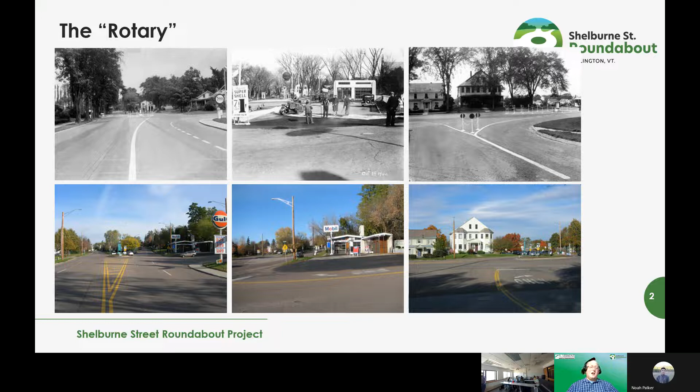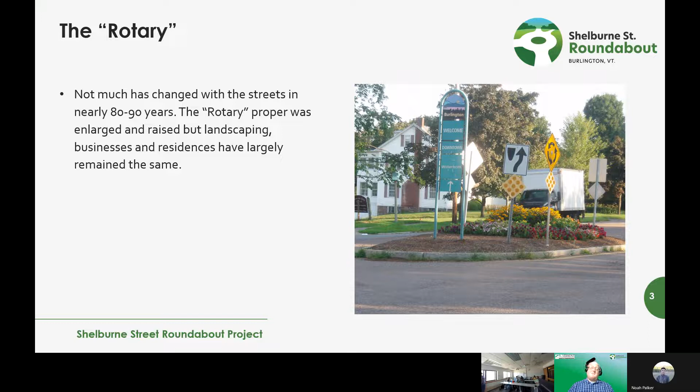These are just some screenshots of what the Rotary intersection used to look like, from the 1930s and 1940s. It really hasn't changed much over the better part of a century. Colloquially, it's called the Rotary, even though it was only a little tiny island. For whatever reason, that's what the locals called it. So yeah, nothing's really changed. We've had some landscaping, some residences and businesses have come and gone, but other than that, the intersection's been the same and it's been in dire need of some help.

Why does it need help? Here's a long list of reasons. It's been on the high crash location list for at least the last 25 years consecutively. I can't think of another intersection in all of Vermont that has been on our high crash location list consecutively for this length of time. The Rotary, the little island, was just too small to create any sort of safety benefits to motorists. We'll talk about non-motorists as well, but motorists up front, because the HCL is really about vehicular crashes.

It was too small, so it didn't really do its job, and it was just wide open out there, so it didn't really encourage people to slow down. It probably encouraged people to speed, if anything. The left turn movements were really awkward because of the size and location of the existing island, as well. And there are some uncontrolled drive accesses, and the school and the church are nearby. These are all different reasons why this intersection lacked safe mobility.

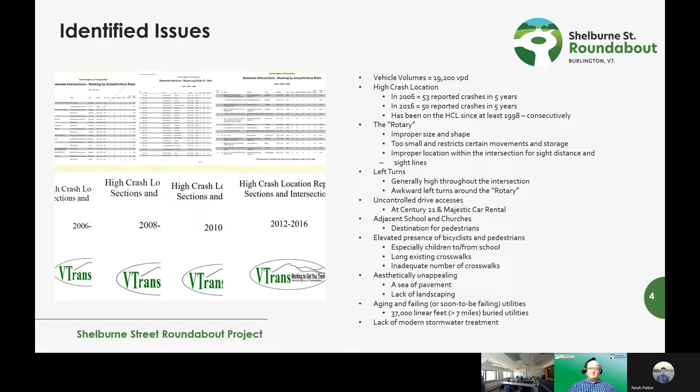So in 2003, the city reached out to the RPC, and they really wanted to look for a solution here. They did some studying, and ultimately, long story short, they came up with the modern roundabout as the solution. Because we're in active construction now in Burlington, I don't have any pictures of the roundabout yet, but we will. So I provided some pictures of a roundabout we constructed a couple years back in Waterbury that's identical in size. So this kind of gives you an idea of what we're going to be constructing in Burlington.

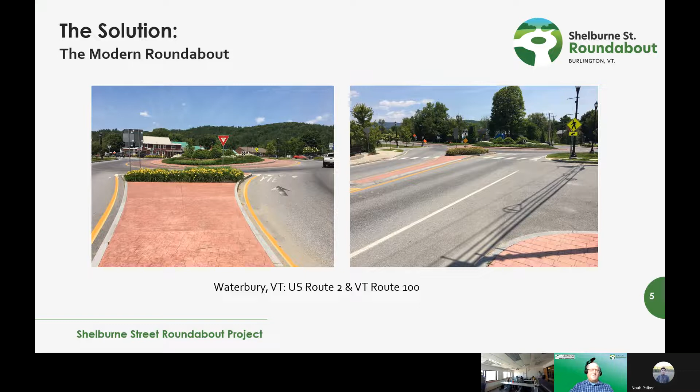Hold on one second, Mike. Yeah. Go back one slide.

All right, Mike, you're good. Okay. Yep. Thanks for that.

So what does the modern roundabout provide? Why is it a good solution at this location? It can easily handle the traffic that's out there. We looked at scenarios where the Champlain Parkway was constructed and where it was not constructed, and we looked at the volumes. The volumes have been decreasing out there for the better part of the last 5 to 10 years. We took the worst case scenario and we said, okay, let's assume the parkway is not constructed. So we came up with 19,200, give or take.

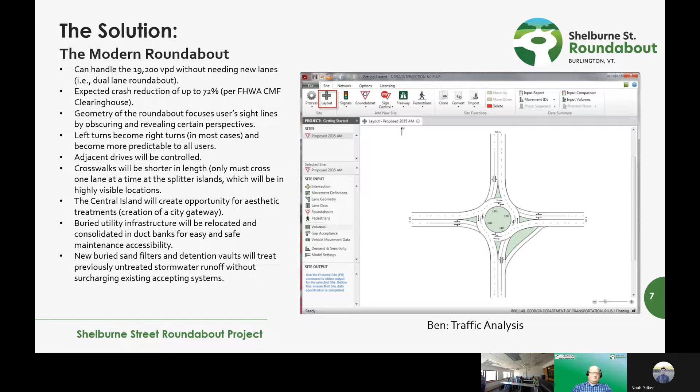Okay. So with all that, just building upon, another reason why we want the roundabout is to drive home the point that we need to get vehicles to slow down. Speeds through here are way too fast. Why do we need to get vehicles to slow down? That's probably an obvious answer for everybody sitting in this room, but it isn't necessarily to the general public.

So, we need to give drivers more time to react at an intersection, especially of this complexity. You create that time by getting them to slow down. They can see more other vehicles, turning vehicles, bikes and peds. So slow down, more time. But also the crash implications are obvious. If slow vehicles collide, you get property damage only collisions, or what we call fender benders. And that's where the roundabouts really shine, in the reduction of severity.

In the case of the Brattleboro roundabout that Ben was just talking about, when we built that roundabout as a dual lane roundabout in the late 90s, I think, it was a signalized intersection before then. And it was bumper cars out there with the signal. The roundabout, once it was constructed, didn't necessarily reduce the number of accidents; believe it or not, it actually increased it slightly. But before the roundabout went in, we were putting people in the hospital left and right.

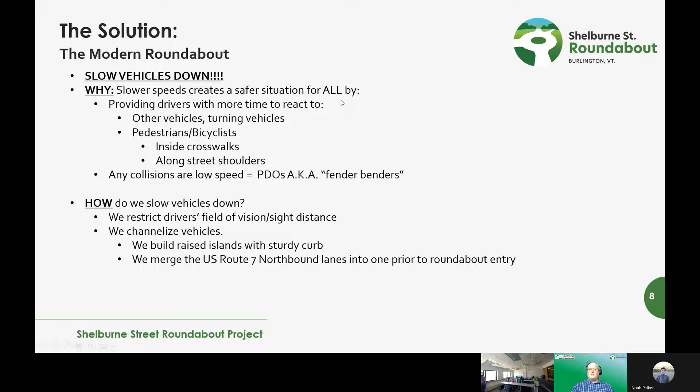Trying to get the two lanes northbound on Shelburne Street to merge into one beforehand, rather than the current situation where both lanes were entering the intersection. So these are just some ways we can slow folks down.

So getting into the construction. Challenges to implementation, there are many on this project, and we'll kind of step you through some of them, hopefully without boring you too much. But first up, stormwater. Like I mentioned before, there was no existing treatment for stormwater on this site. There were multiple outlets. It was pretty much uncontrolled.

So what did we need to do to try to fix that? We designed and built a permitted system that would gather, convey, and treat stormwater. And because a lot of the city's existing infrastructure downstream of this site was old and small, we really needed to figure out how we were going to slowly discharge into that system without inundating it and making problems worse downstream.

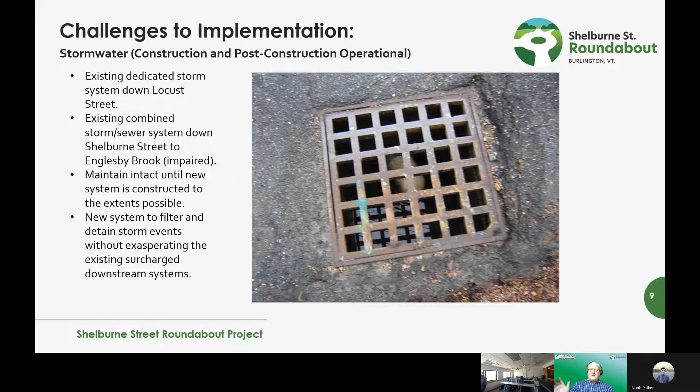Yep. So it's a significant amount of water, but it should do the trick, and it should hopefully alleviate any sort of surcharging downstream of the existing system. Do you have anything to add to that, Ben? No, I think you covered it pretty well.

Question. Did you guys do the stormwater analysis for this yourselves? We did, yeah. So part of being a small agency in a small state is, my focus is traffic and traffic modeling, but as a project engineer, you do a little bit of everything. So the stormwater for this project was designed in-house using HydroCAD. So we can model the system and then run an analysis through it, finding the hydraulic grade lines and everything through the system. And then we worked with state regulators and the city water department to make sure we were

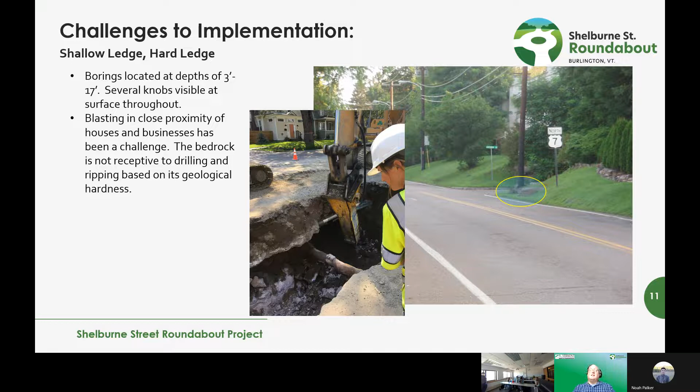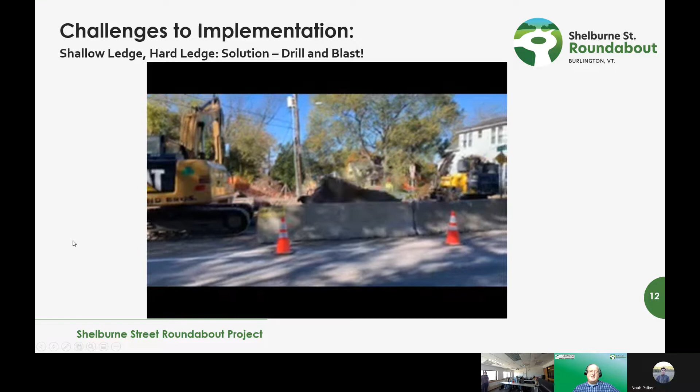here's a couple of videos that I hope show up of a couple of the blasts to give you a sense. And as you can see, they're not very energetic. They're not like what you would see in the movies, right? They're very small. They're very controlled. So we do it smartly and safely as best we can.

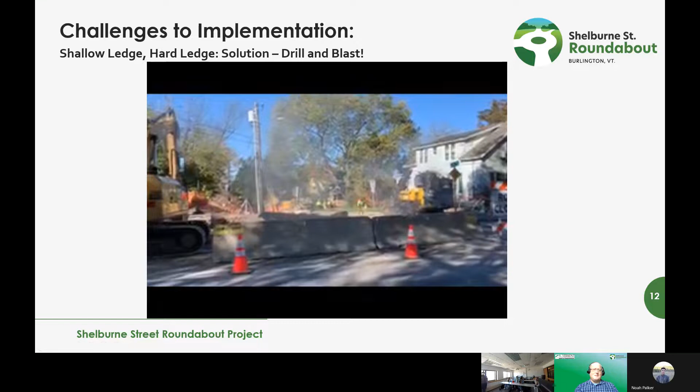In all fairness, sorry, Mike, in all fairness, is this the video too? So what you see here are called blasting mats. And so basically it's a bunch of tires, but it's hundreds and hundreds of pounds. They'll move those with the excavator to get them in place. So it doesn't seem like a ton of explosive power, but it is quite a bit to launch those mats like that.

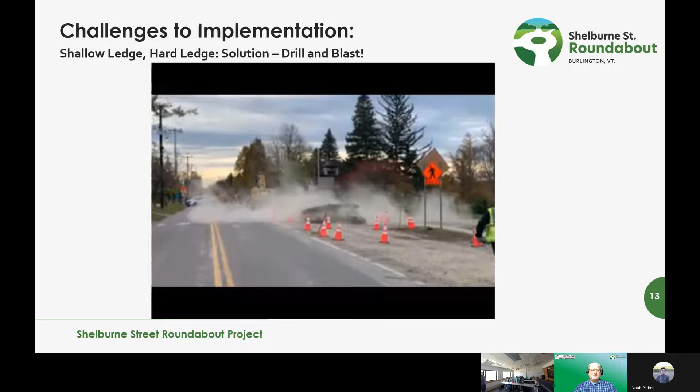When we did a blast along this road, there was a tree nearby that kind of did this. So we had the contractor go into all the homes and businesses in the area and conduct a pre-blast survey. So basically document the condition of all these homes, because, in Burlington, one home's 10 years old, the one next to it is 150 years old. And that way we could monitor if there were any issues arising from all the blasting.

Yeah, thanks, Ben. That's exactly it. And just to end that conversation, I believe our geologist was telling us that this was some of the hardest rock at least in this side of North America. I don't know how they come to that conclusion, but that's what we were told. So it just added to the misery of the blasters.

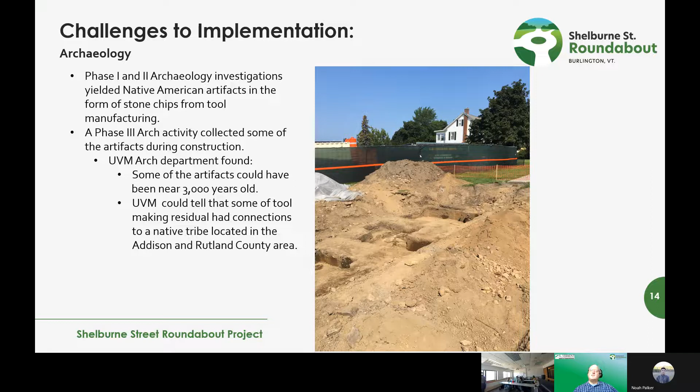if it couldn't get any worse, we had contaminated soil and groundwater on this project as well. At one point, there were 4 gas stations somewhere along this project location. Each of them had some level of leakage or contamination. There's only just the one gas station, the Rotary Mart that you see in the back of this picture here, that's still existing.

The site that this picture is of is what's called the old Rotary Gulf site, and that was really probably the biggest offender. They had quite a bit of leakage out there, petroleum, and the DEC was actively working with the property owner to try to get it cleaned up. They tried unsuccessfully using like an air sparging system, which I can't even explain to you what that is. But apparently that remediation had failed over the last several years.

So DEC asked if they could piggyback onto our project and have our contractor do some of the excavation and try to get some of that dirty dirt out of the site while we were there. So we agreed to that. It complicated our project a little bit more, but I think all parties are kind of glad that this site will be clean when all is said and done.

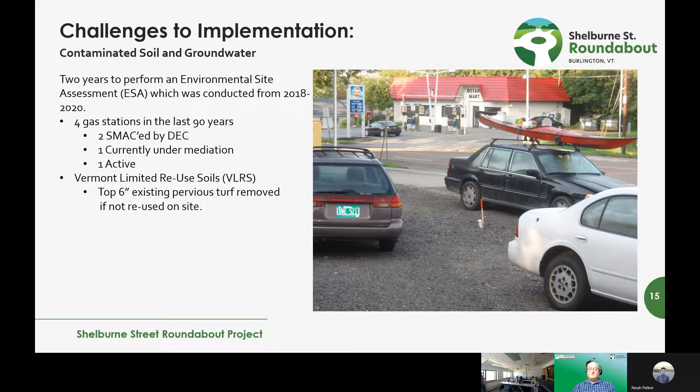This is the same site. This is during cleanup. This happened in August, September of this last fall, and you can see we dug way down. We were down, what, Ben, probably 10, 12 feet, I think. 11.5 feet, yep. 11.5 feet. And it's hard to see in the picture, but if you were to look at the standing water in the bottom of the pit, you can clearly see a sheen. There's definitely gas and oil in that water. So it was dirty dirt is what they like to call it.

They dig the pit, excavate as much as they can in the first photo. In the middle photo, you see them actively sampling the soil. And they have to do that before they truck it off to get treated or disposed. In this case, most of it was disposed at a landfill. And in the photo on the right, you can see the contractor is lining their trucks with poly, essentially really thick plastic, because we wouldn't allow them to truck this wet soil 2.5 hours up to the landfill and have it drip out the back end. So we made them line their trucks with poly.

Anything else on that, Ben, on contaminated soils and groundwater? No, that covers it pretty well. This, we trucked out over 2,000 cubic yards of contaminated soil. And this is one of 3 different smaller sites within the project that all had petroleum contamination within them.

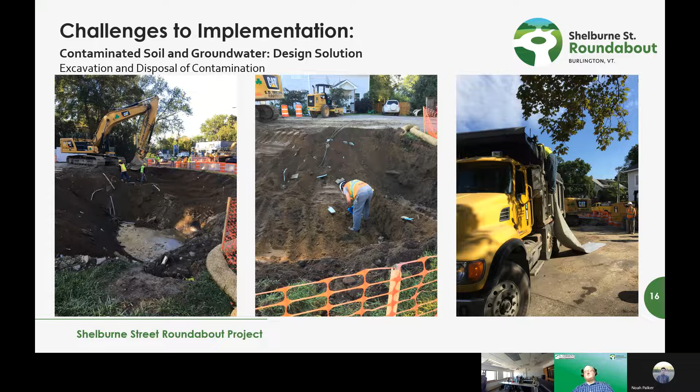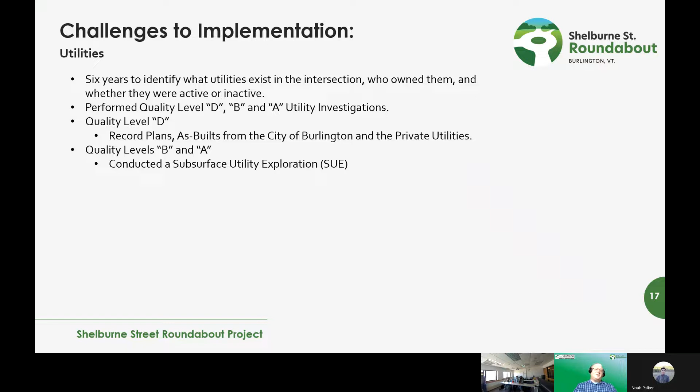Utilities is a big part of this project as well. So we took 6 years to identify what the utilities were under this intersection, who owned them, whether they were active or inactive. We did several different quality levels of utility investigations. We did a D, a B and an A. Quality level D investigation is essentially looking at what the utility companies have on record. And then quality level B and quality level A are contained under what's called a SUE, a subsurface utility exploration. We performed that SUE back in 2015.

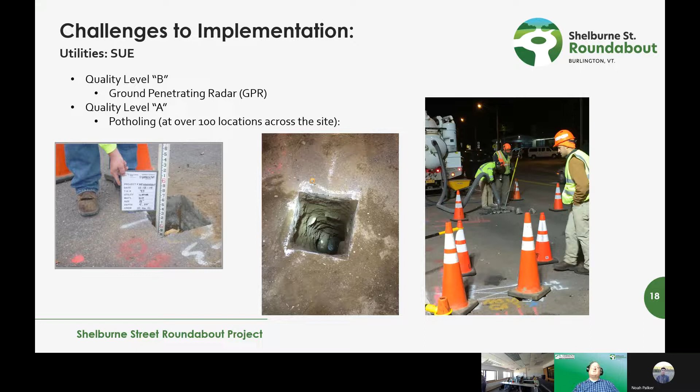And in the photo on the right, you can see that vac truck sucking out the material and then putting it back in after the fact. So that was a little bit of intensive work. It's labor intensive, but the information that's gleaned from it is extremely valuable. And our federal partners really encourage us to do this, and they are okay with us spending extra money doing this because an ounce of prevention, it's that old saying. So they see it as an investment, because we really didn't want to run into some major utility issues during active construction.

What the SUE revealed was that there was about 7 miles, 37,000 linear feet of existing utilities under this intersection, which is just insane. And it's every single utility you can think of is under there. Some of it is new, some of it is super old. And there was no way we were going to construct this intersection without having to do a very robust plan for utility relocation. And that's what we did here.

We opted to go with a concrete encased duct bank, which varies in different sizes and layouts. We ultimately built them a new water line. I heard this morning that they're just about done all the water line work. So that was very encouraging to see. They worked through the winter to get that done.

And then the sewer lines are super old and they are all built of clay. So just our excavator rumbling over the roadway surface would probably be enough to shatter that clay pipe in place. So what we opted to do was have the city go through and slip line the sewer line. So they blow essentially a balloon. It's kind of like what they do for heart attacks, arteries, where they do these little stents in angioplasty.

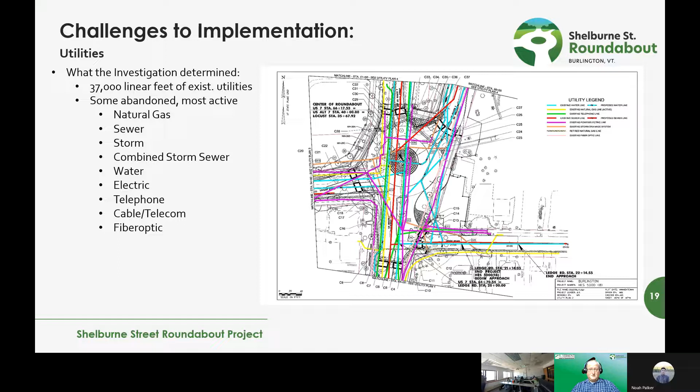Yeah, there we go. Oh, sweet. Yeah. This gives you a better sense as to how messy it was out there. This is the old one though, right? And then this is the new. So a lot of what we did, Mike, if you go back one slide, is essentially all this here, not the yellow gas, but the rest, we're kind of squeezing into one little 4x4 package and running up the side of the road. Seems simpler. Yeah, so if you have to come back here in 100 years and redo the stormwater, it should be a little bit easier to work around. Sweet.

So another challenge that we had was transportation management. We have to keep this intersection open to all users while we're constructing it. We can't just close it completely, not at 19,000 vehicles a day. So we needed to give some thought to how vehicles, pedestrians, and bicyclists get through. We knew because it's such a complex project that there was going to be a certain construction sequencing and phasing to this. There were going to be many lane shifts, some temporary lane closures, temporary street closures. We were going to need to detour trucks.

So these are all different things that we had to be mindful of, on top of trying to maintain constant access to the businesses and the residences, because most of the people here are residences, and they leave for work in the morning, they come home at night. So we need to keep these accesses open. We had the school, which at first was a little give and take with drop-offs and pickups of students, but we're in a groove now with them. We had to keep sidewalks open. So the contractor needed to phase their work such that if they ever had to close a sidewalk, they had to provide an alternative access.

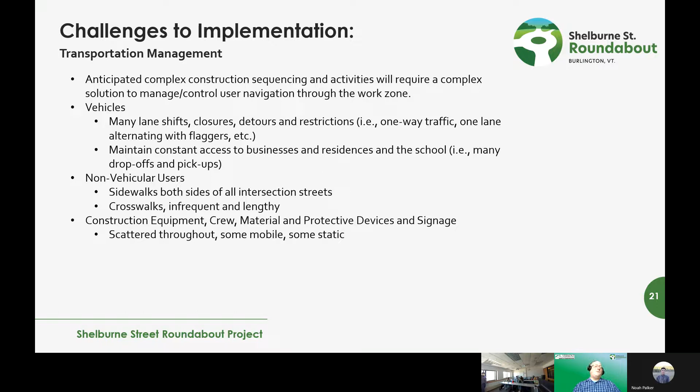But then we have all this equipment, all this material, these crews, all in a relatively small space, if you think about it. This isn't a long linear paving project over 20 miles where you have a lot of space. This is 600, 700, 800 feet to work with, and you have a lot going on. We do it as part of our normal operating procedure for all projects, but this project in particular needed more focus on transportation management. So we developed what's called a TMP, a transportation management plan. We looked at what long-term closures would be required. Can traffic be detoured? If so, can the side streets handle it? Where are the detours best to put? It's all summarized in this TMP.

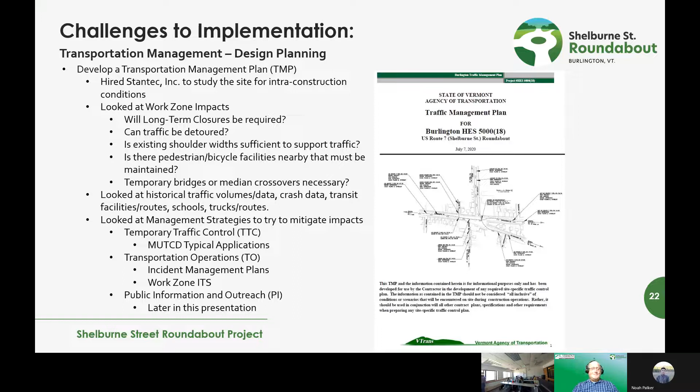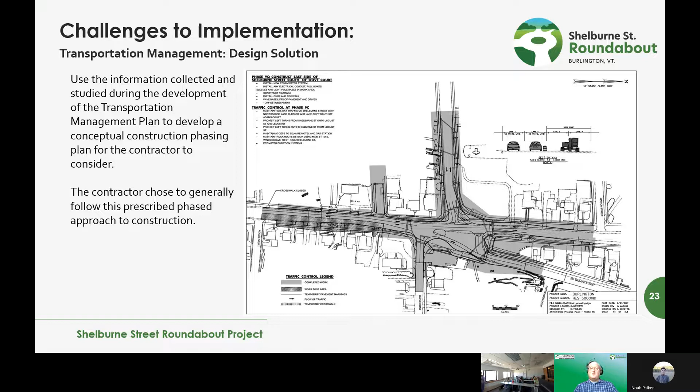And I guess I won't spend too much more time on that. So in addition to the TMP, we laid out some prospective construction phasing for the contractor if he chose to utilize it, and generally they did for the most part. And then they are required to submit the ultimate traffic control plan that they are planning on using during construction for our review and approval. What you see on screen here is an example of that. It shows things like, where's the work area? Which sidewalks are closed? Is it one-way alternating traffic? Is the street closed? And that's all documented in their TCP packages that they submit.

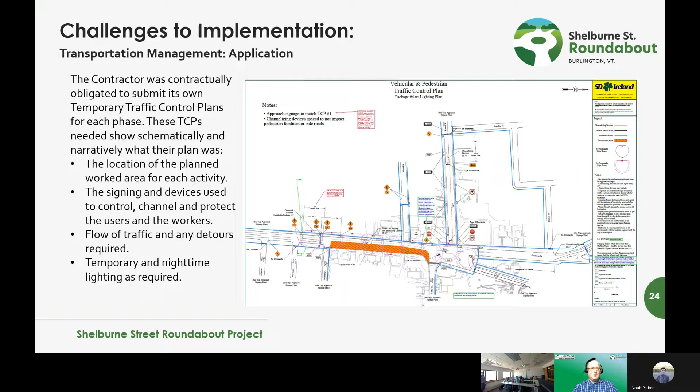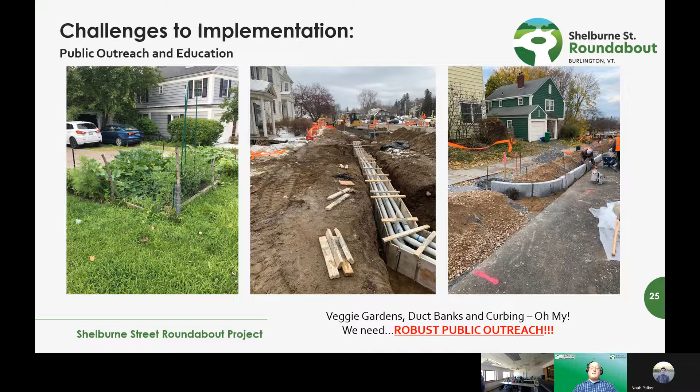And so we really needed to have a really robust plan to interact with these folks, not just the people that live and work there, but also the people that just commute through the intersection as well. So we hired a company to kind of take the lead on that. They're a public information consultant. They're called WSP. We developed a public information plan that outlined all the different activities we plan to implement to engage the public.

They do things like what we're doing today. They set up and coordinate with folks that want us to come and speak to them. They also participate in our weekly construction meetings. They're the ones that post all the warnings and updates, traffic updates. They're the frontline folks that receive all the complaints and the rare compliments that we might get. And they also developed and actively maintain our project website, and they produce printed material.

They do things as simple as door hangers for folks that essentially say, hey, listen, we're going to shut your water off in the next 24 hours. So we needed somebody to do that. I couldn't do that. I'm too busy to do that. Ben's too busy to do that. So we had to hire that out. And it's money well spent, to be honest with you.

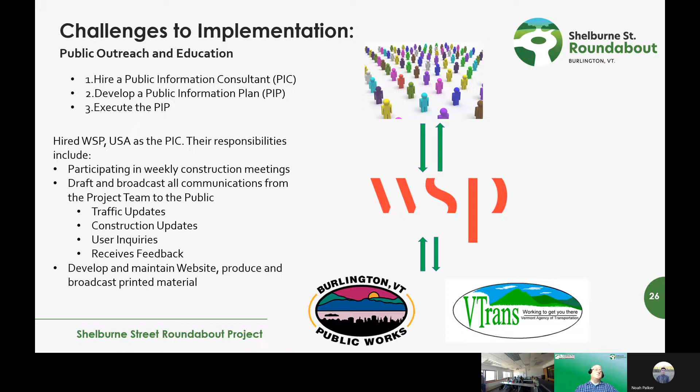Here's some examples of some of our outreach efforts that we did. I will tell you at the end of this presentation to go visit our project website if you haven't already. Sounds like you guys have had a little bit of information on this project already. We did an educational video, how to navigate a roundabout in general, but we also did a project video as well. That's on our YouTube site. I think there's links to it on our webpage as well.

And by the way, if you watch those, the voice you hear is Ben's. He's the one who did the lovely voiceover for those videos. So thank you, Ben, on that, because I did not want to do that.

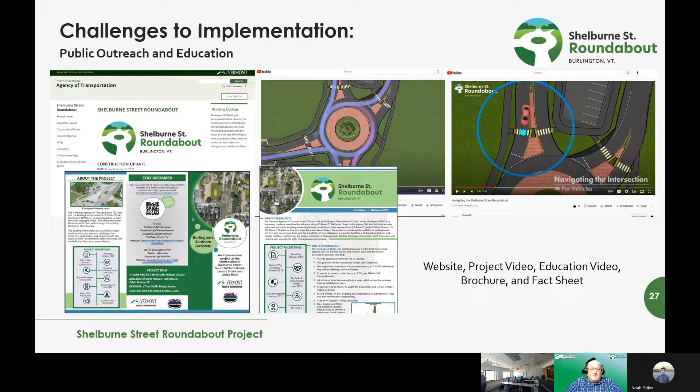Mike, we got a question. Do you guys have a similar video to show how to cycle the roundabout? So pedestrians and cyclists are covered in here. Maybe not as robustly as we'd like, but they are covered. And if you see, this is kind of the footprint of this roundabout, we do want to produce one that's kind of a generic multi-lane roundabout so people can understand how to drive those. There might be some coming in the future here. And Vermont still is a little slow on accepting roundabouts. But we're making progress, right, Ben? Slowly. Yeah.

So to conclude, really, we spent 16 years on this project, and it's a long time. Not all of our projects last this long. I know the public probably says, well, the state takes forever on all their projects, but we're getting better at that. But considering the complexity of this project, 16 years seemed about right on. Like I said before, utilities was like 6 years of that. So there was a lot of planning that needed to go into a lot of these challenges that I spoke of today. So yeah, we went from 2007 to 2023, cradle to grave. We spent about $1.6 million on planning and designing and permitting it.

We thought it was going to be somewhere around 7 million. We ultimately decided that the engineer's estimate would be about 7.9, and I'm pleased to say that the bid came in at 7.7. Short of 7.8. So we were really pleased with that educated guess. Although Ben did the estimate, so I won't say that. I knew exactly what it was gonna cost the whole time.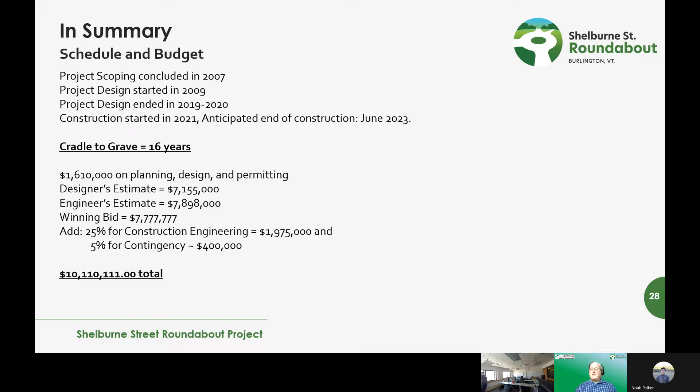And then you add a little bit of money for some construction engineering and some contingency, and we come in at about $10.1 million. It's an expensive project, but it's a project that we felt, and the city felt, was worth investing in. Yeah, we'll see how close we come to that 10.1 when all is said and done.

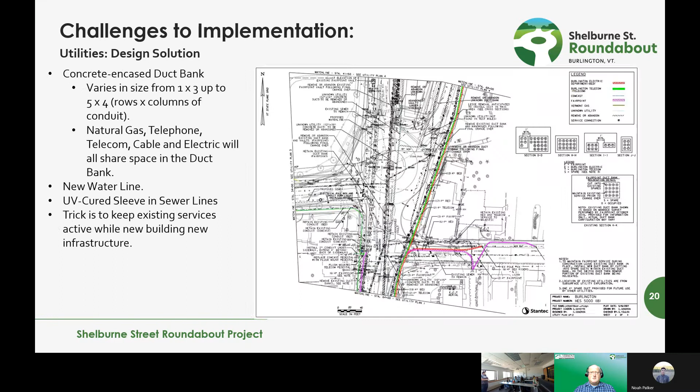So, that works when it's just that one approach. It's not a truck route or anything. A bus comes up there or a big garbage truck, somebody takes a wrong turn. They can fully circle the roundabout to make that right. But in all the other movements, Route 7 is a truck route. So we have to make sure, and we use a program called AutoTURN, and we can basically drop a vehicle on here and kind of drive it through the intersection.

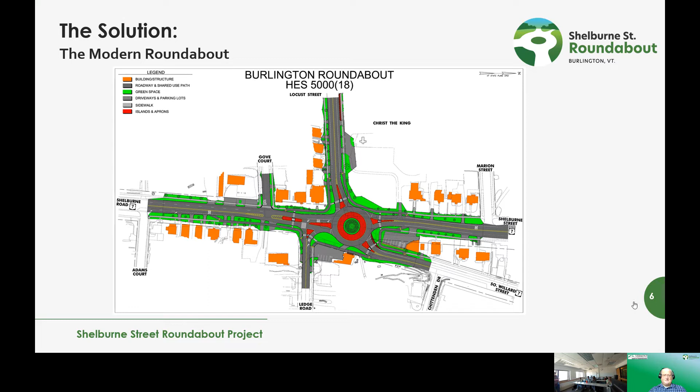And if you invite us back ever, I can always show you the exit 16 DDI. We've been litigating that project in the courts for about 7 years. So if you want a story on every way the public can affect a transportation project, I'd be happy to come back and tell you guys about that. Cool.